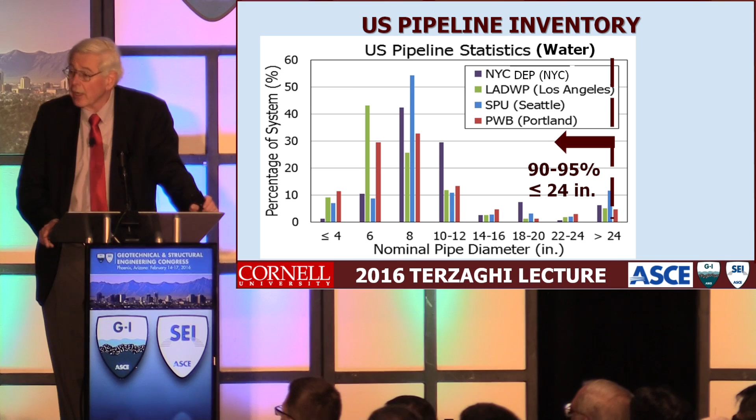Let's look a little bit about that inventory for a minute. What I have here are bar charts showing the percentage of the system associated with various pipeline diameters for 4 major water supply companies, including the New York Department of Environmental Protection and the Los Angeles Department of Water and Power. There's a very interesting statistic here that about 90 to 95% of all of these are in sizes less than or equal to about 24 inches. In fact, LADWP calls their distribution pipelines anything less than 24 inches, and their trunk lines anything larger.

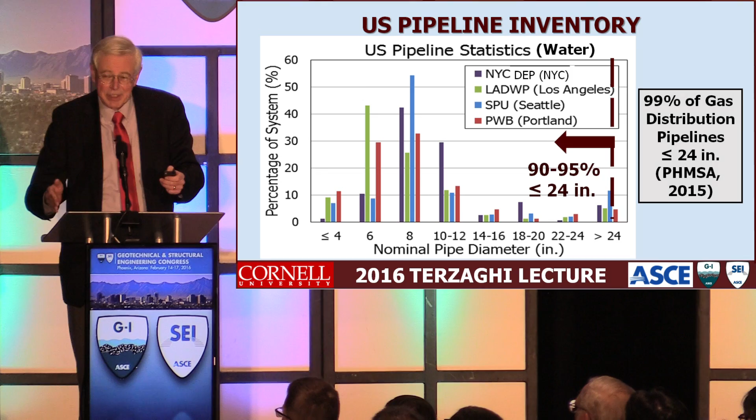Similar statistics can be gotten from the PHMSA, the Pipeline and Hazardous Materials Safety Administration, which has compiled statistics on gas distribution pipelines in the United States - 99% of them are less than or equal to 24 inches. The larger ones, of course, are some of the greater and more important ones, but just to get the statistics right and a sense for the composition of the systems, I thought I'd lay these out because we'll show how they become important later on.

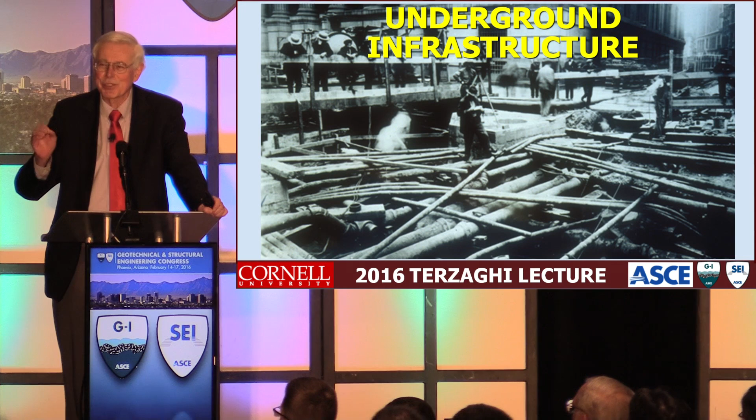So just look at that. That is the national treasure. Those are the pipelines that convey the services and resources that make modern societies work, and they're an absolute mess. This is a wiring diagram. Look at the incredible complexities of the pipelines there. Like any treasure, we bury it underground and then forget about it for ages until there's a problem associated with it.

Pipelines are part of a national challenge to be able to manage, understand, and work with our infrastructure and to make it a better infrastructure. These are some of the issues we have to deal with when we're working in this space.

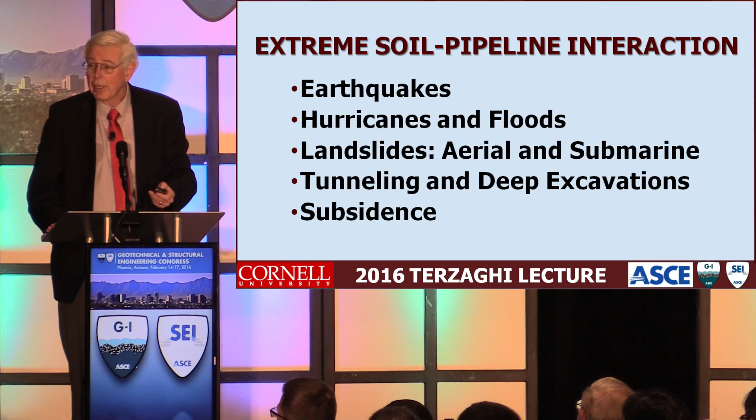Whenever we talk about extreme soil-pipeline interaction, two aspects automatically come to mind: material and geometric nonlinearities. This is a double-edged problem because we have material and geometric nonlinear properties for the soil, and simultaneously material and geometric nonlinear properties with respect to the pipeline structure. The greatest challenge is the geometric nonlinearities, because when pipelines deform and the ground begins to fail along specific failure planes, you get complicated and complex behavior.

So I'm going to start the technical part of this talk by looking at where the rubber meets the road, and that is where the soil and the pipeline meet.

But they will eventually squeeze shut, and that'll be a function of what kind of pressure they're carrying. But often in an extreme event, we can't rely on the line to have pressure in it, because it could lose pressure from a variety of different operational or other failures in other parts of the system. So they really need to survive with low or zero pressure if they're going to maintain their integrity.

We studied these pressure distributions by using tactile pressure sensors. These were introduced to us by Tarek Abdoun at RPI. We were able to make them work in these large-scale tests where there was great deformation and distress on them. This is a picture of one of them with one of our lab technicians, Joe Chipolowski. There are about 2,000 sensors.

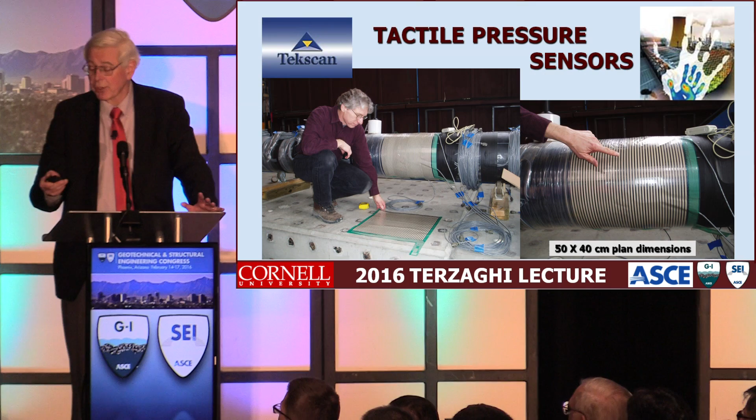These are electronic sensing units which will have voltage drops, which when we monitor them, we can come up with a pressure distribution and therefore actually measure the pressure distribution around nonlinear objects like pipelines under large ground deformation.

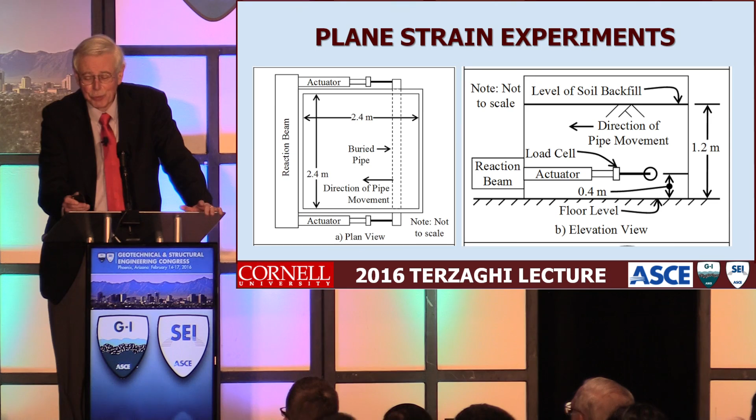We could get the pressure distributions from the tactile pressure sensors, and we could validate those because we were actually measuring with the load cells the actual loads in the pipe, and we could correlate the pressure sensor loads with the actual measured loads.

One of the things we want to do when you get that kind of test measurement, you're getting a normal pressure on the pipe, which is illustrated by this picture. And if you want to break that down into the horizontal pressures, then you have to decompose the normal force, which also generates a frictional force on that pipe. So there's a double decomposition to get the horizontal components, which is illustrated in this particular diagram.

You can integrate this. Now, this is an equation that was originally developed by Mike O'Rourke, so I want to recognize him for doing that. We used it as our research team. It shows here you can integrate the horizontal components from those components which are perpendicular to the longitudinal axis of the pipe, from the normal force and also from the frictional force.

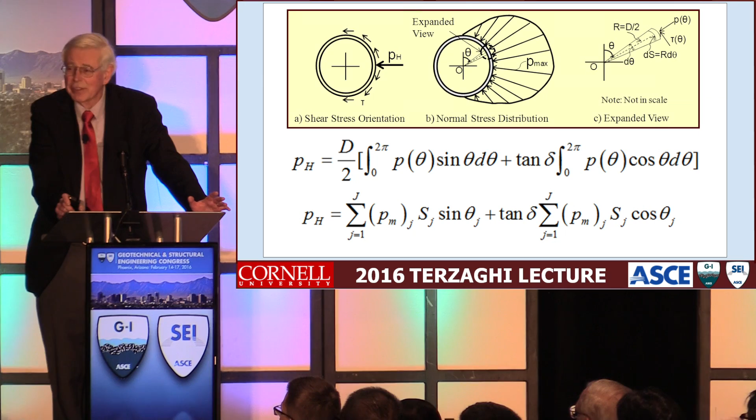And you can also do this in a numerical fashion by using the actual tactile pressure sensor data, which is the second equation there. And here's some examples of the pressure distributions that were monitored during some of these two-dimensional plane strain tests.

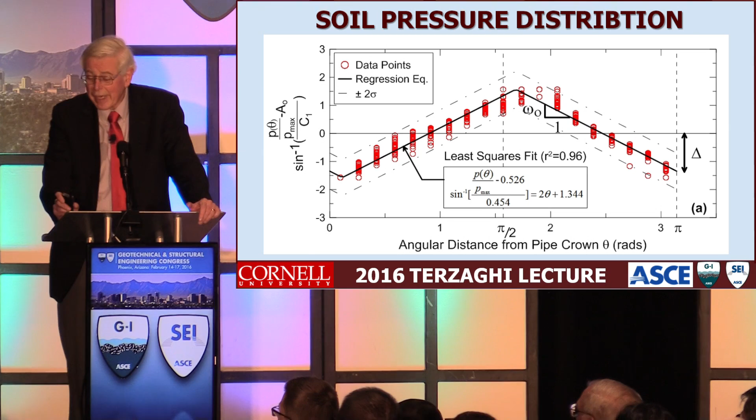What you can do with those data is take it and put it into some form of a conversion function. In this case, if we assume there was a sinusoidal distribution, you can take an inverse sine function and turn that into a linear regression, and show that regression will fit the sinusoidal distribution of the data, and be able to tag that with some moniker or metric of the statistical substantiation or stability of that.

So we have an R squared of about 0.96. You can see the black regression line. It's a very well-defined sinusoidal distribution. You can see the data ranges. We have about 17 or 18 different data sets shown in this particular slide.

And I think what's also quite interesting, and we'll come back to this later, is that there's numerical analysis that we've done. You can do the same thing with those. You can take the normal distributions to those and decompose them into the horizontal components, and they actually show a very good relationship too.

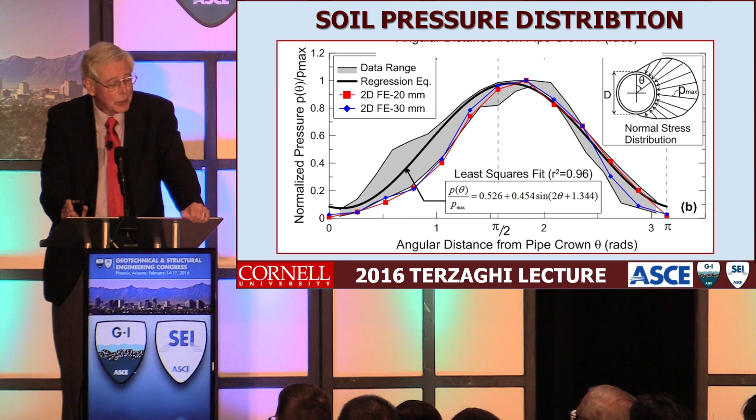So in this particular slide, what we've done is plotted the normalized pressure distribution, that is the pressure distribution divided by the maximum pressure, and you can see the good fit with respect to the sine function.

For lots of numerical reasons, when we roll these things up and do analyses, it becomes useful for us to be able to define what we would call an apparent frictional force, which would be generated by the horizontal force in this case, that P sub h, multiplied by the tangent of delta, where delta is the angle of soil-pipe interface friction, rather than to do the stress normal to the surface. We have two ways that we can decompose our forces.

We can decompose forces perpendicular to the longitudinal axis of the pipe, or perpendicular to the surface of the pipe. It's the one that decomposes perpendicular to the surface that generates the frictional resistance longitudinally. So to couple all of this, you look at the relationship between the actual friction, which is longitudinal—that's F sub t—and the apparent friction generated by forces perpendicular to the longitudinal axis. We've measured these very precisely, and we can plot them to get a transfer function.

You can use this dimensionless value, plotted as a function of the interface friction angle. If you're testing a high-density polyethylene pipeline, which has a tan delta of around 0.4 or 0.5, you don't need a correction—the two values are virtually identical.

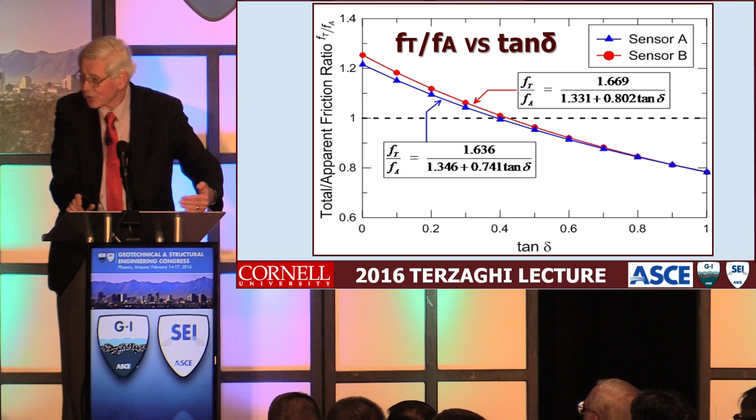So the first thing we learn from this ability to look at the interface—where the rubber meets the road between pipe and soil—is that we need to account for the coupled transverse and longitudinal soil forces.

In the Terzaghi paper, we'll talk about how you can do that in one of the readily available softwares, Abaqus. Basically, you create gap elements which are linked in with your force relationships between the pipe and the soil, perpendicular to the longitudinal axis of the pipeline.

You couple it by virtue of the true friction normal to the surface of the pipe, so that you are truly in two dimensions, accounting for the coupled forces perpendicular to the longitudinal axis and the frictional forces which develop longitudinally. If you don't do that, you will not have the right answer, and you can be very far off and unconservative in the process.

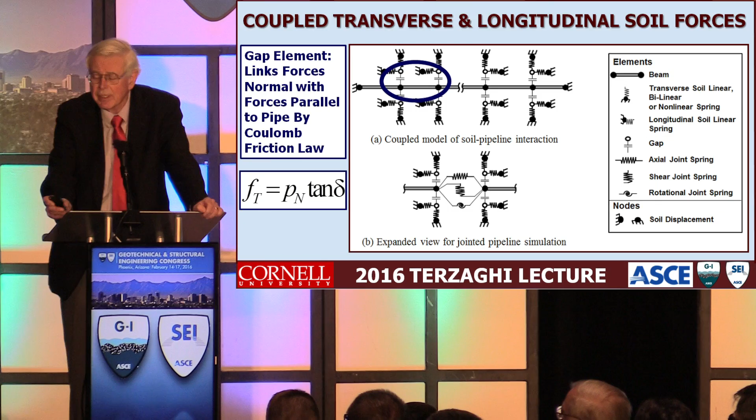So, first lesson: the soil-pipe interface relationship between soil force normal to the pipe surface versus force normal to the pipe longitudinal axis is key for modeling coupled soil-pipe interaction, and for evaluating friction along the pipe from soil force normal to the longitudinal axis. We have provided a way to account for that.

Now, I don't want to call these springs because they're far more complex than that. They're nonlinear and can account for strain softening behavior. You can pack a lot of detailed soil-structure interaction into these, or you could make it very simple and make it a spring. But we have the capacity to go far greater and do a much more sophisticated job, replicating very complex interactions in the pipe and in the soil.

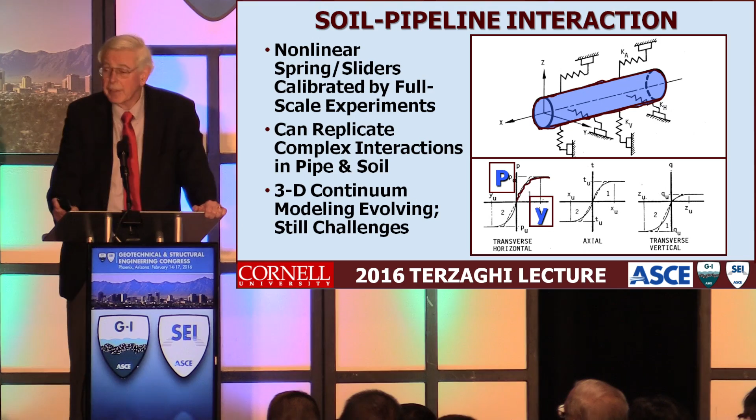And then there's also 3D continuum modeling, which is going on. It's evolving—there are still challenges, but there's been some extraordinary progress made in three-dimensional modeling too.

And then there are a number of very interesting works. Our colleagues at RPI and ourselves, with Xi et al., in a paper in EERI in 2013, looked at a variety of different ways of modeling three-dimensional pipelines in solid soil conditions, modeling the pipe as a shell element and modeling the soil as a solid.

Recent work, Robert et al., this is work that we did with the folks at Cambridge, Kenichi Soga, and Dylan Robert, who is a professor at RMIT in Melbourne, Australia, looked at a variety of three-dimensional shell modelings, and some excellent work by Vazouras in Greece looked at three-dimensional soil pipe interaction conditions.

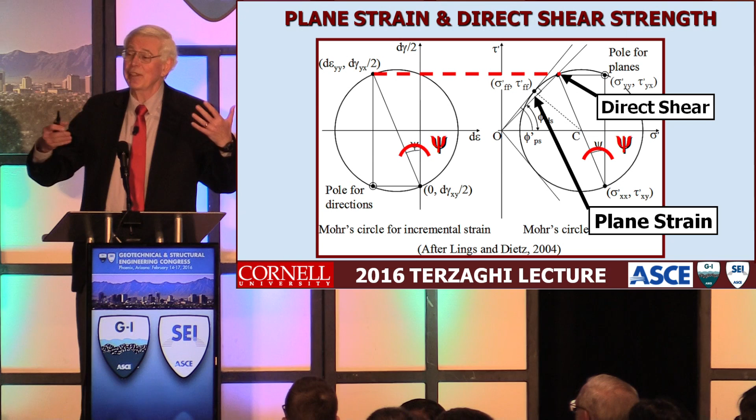Also, when you recognize that failure of the soil along the longitudinal axis of the pipe is also a surface of zero extension, you actually have a test that can provide relevant strength data for the interface as well as for the soil structure surrounding the pipe.

We perform tests because we come from an area that was glaciated, and believe me, when we left Ithaca it was 16 below zero. I think glaciers were coming back.

We deal with glacial fluvial sand. I'm showing some of the characteristics there, and some of the types of direct shear boxes that we use—large ones, 100 millimeters, 300 millimeters in diameter. We decided to characterize the sands as medium, dense, and very dense, and those are associated with direct shear angles of shearing resistance varying from about 35 to 43 degrees.

But when those are converted into plane strain, they go from about 41 to 49. So these we're taking as emblematic, or representative, of granular material. That's because these are the kinds of soils that we looked at. We looked at them fundamentally, but they still have specific characteristics which you see up on the screen.

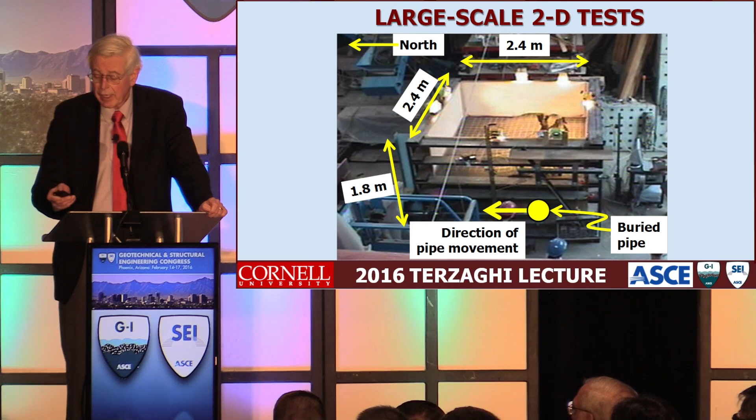Then we developed some two-dimensional models for these plane strain tests that we ran. This is just showing a picture of one of these plane strain tests. Our analytical model worked off a Mohr-Coulomb yield surface. It had a strain-compatible modulus, and we also had a special subroutine in there for strain softening from peak shear, so it could account for strain softening situations.

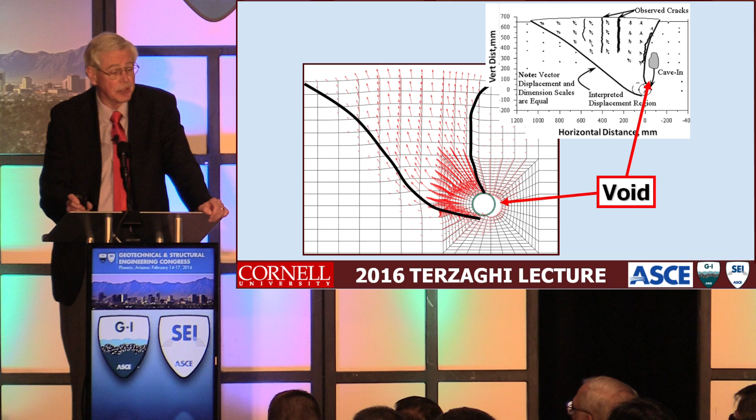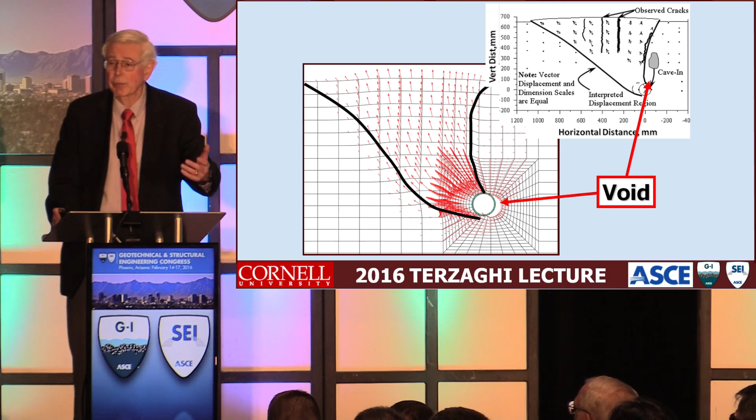If we show the next slide, you can see some of these simulations with the pipe being pulled laterally through the ground. If we freeze that and look at some of the testing, you can see that the pipe pulls away from the soil in the analysis, and also in the tests the pipe pulls away and leaves a void, particularly when we're testing with partially saturated soils, which are really the right representation for the soils we're going to account for in practice.

In fact, when we compare the analytical results with the experimental results, there's been excellent agreement, not only for these tests associated with lateral pipe-soil interaction, but also vertical upward pipe-soil interaction, even to the extent we've developed an auto-remeshing situation where you account for the pipe moving up in the soil, as it begins to punch out of the ground, the reduction in vertical force, and the way that relationship between pipe force and displacement should look.

So we can roll these up, and these have been published in various journals, including the Geotechnical Journal, Geotechnical Geoenvironmental Engineering Journal, and the Canadian Geotechnical Journal. We show these dimensionless forces, which are the forces we measured, divided by the unit weight of the soil, the depth of the center line of the pipe, the diameter of the pipe, and the length of the pipe. If we take the length as a unit, you can get the force per linear distance. We plot these relative to a dimensionless depth, which is the depth of center line divided by the diameter, and can come up with relationships that allow us to predict what the maximum forces are going to be on the pipe.

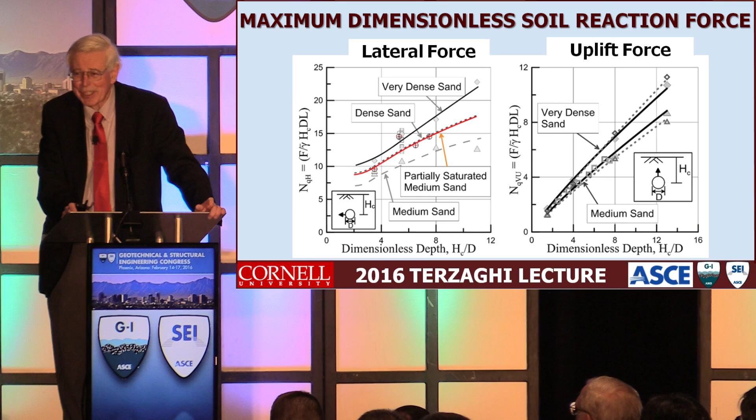Now, there's something really interesting in this picture, particularly the one on the left, because what you'll see in that orange line are the partially saturated tests we performed at Cornell, along with the dry soil tests. For the same soil with the same dry density, the partially saturated medium dense curve is higher than the medium dense dry sand curve. So suction in the soil is contributing an additional 20% to the load. That's something that's generally not recognized or neglected when we account for this interaction between the pipe and the soil.

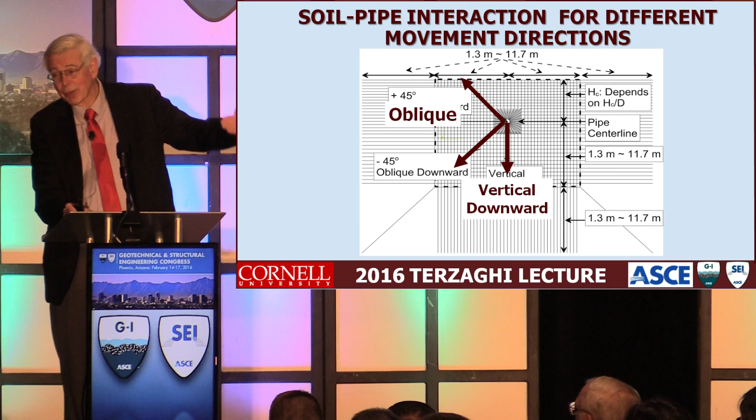We can go further with this model, having validated it in the two directions we've tested intensely and feel comfortable with the model. We now can look at pipe-soil interaction in the vertical direction downward, in the oblique directions. We can do a full 360-degree sweep to come up with a characterization of the soil-pipe interaction for any direction at any depth in the soil. And that's what we did.

We started off with the vertical, and when we ran the vertical, you can see on the left-hand side the dimensionless force plotted with respect to the dimensionless depth for the vertical reaction. We also could compare that vertical reaction with the conventional bearing capacity equations, which are very often advocated and used in design. We found that systematically the actual forces we were modeling were less than what's given by the conventional bearing capacity formulations.

This was an observation also made at RPI based on some of the centrifuge tests they did for normal fault interaction, where they suggested reducing the conventional bearing capacity formulations by about a half, and sometimes as high as a third. So we certainly can validate that particular experimental observation from our colleagues and show that, in fact, there is a lower resistance, and we factor that into our results. I must say that these are partially verified experimentally by centrifuge tests, and certainly make good sense to us from a numerical simulation point of view, but this is an area where we could actually use some large-scale validation to finally finalize this particular pursuit.

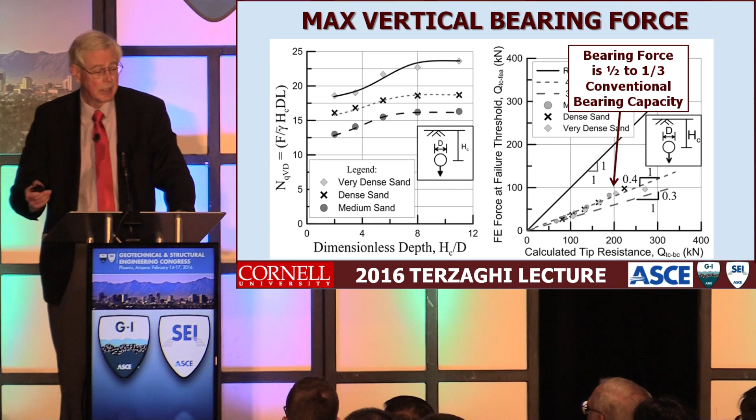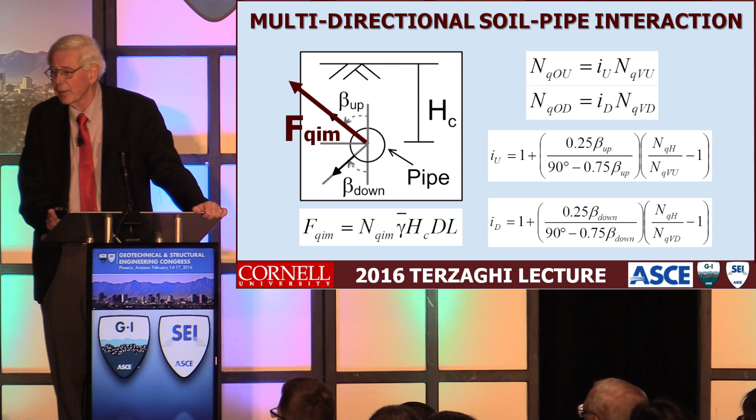By these equations, you can account for the variation in maximum load 360 degrees around the pipe. So you even can boil this down to a set of very easy manipulable equations by just knowing what the reactions are at four points around the circumference of the pipe. And that's really a significant recognition.

These are showing a kind of summary of these analytical results for the ratio of the N-sub-Q, that is the reaction, dimensionless reaction number for the pipe in any direction, normalized by the horizontal, because we have so much good horizontal data from the large-scale tests. What you can see on the left-hand side is the 360-degree plot of that ratio. You could see when the dimensionless depth is shallow, so that HC over D is 3.5 in that upper left-hand corner plot.

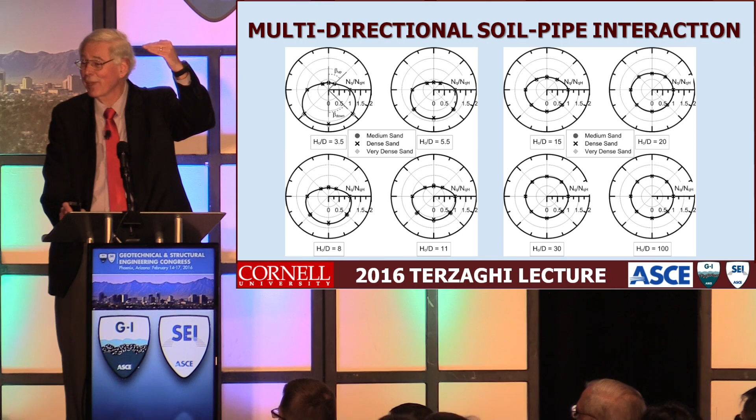You can see that it's a very asymmetric distribution, 360 degrees around the pipe. Because you're so close to the surface, the uplift force is very small when normalized with respect to the horizontal, and the vertical is still pretty high.

But as we continue to go deeper through the soil, you can see that by the time we're getting to depth-to-diameter ratios of around 30, you're getting into circular, and then finally you have circular uniformity where at depth you should not be able to distinguish horizontal from vertical.

So we have the opportunity now to have a comprehensive methodology that looks at the interactions in the full 360 degrees. We also can characterize the force displacement relationships by using rectangular hyperbola. That's a great way to fit nonlinear things. We use it all the time.

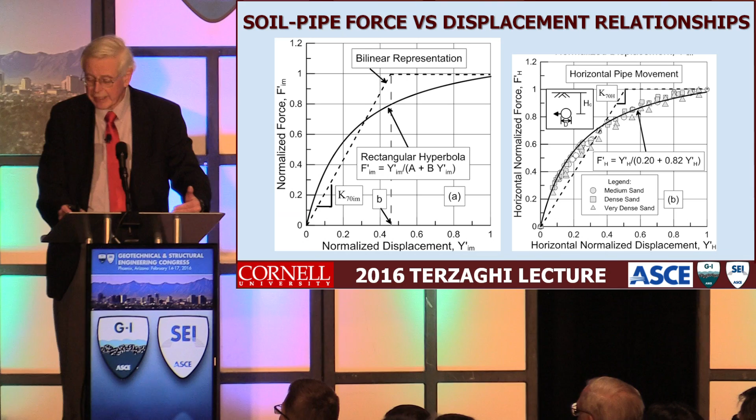And in the Terzaghi paper, you'll see that we've provided equations predicated on this rectangular hyperbola to characterize the force displacement relationship, as well as the maximum force in any given direction at any given depth.

Now that brings me to soil suction. We depend upon soil suction all the time for the stability of the ground, because if everything was dry, we would have just the friction we were supposed to have. But really what happens is we live in the vadose zone. Many areas will have partially saturated or unsaturated soil conditions, and that apparent cohesion keeps things going.

It's when that breaks down that we actually get some surprises, and we get some landslides and things of that sort at times. That works to our benefit, but when we're characterizing the reaction between pipes and soil, it works to our detriment because it adds to the resistance.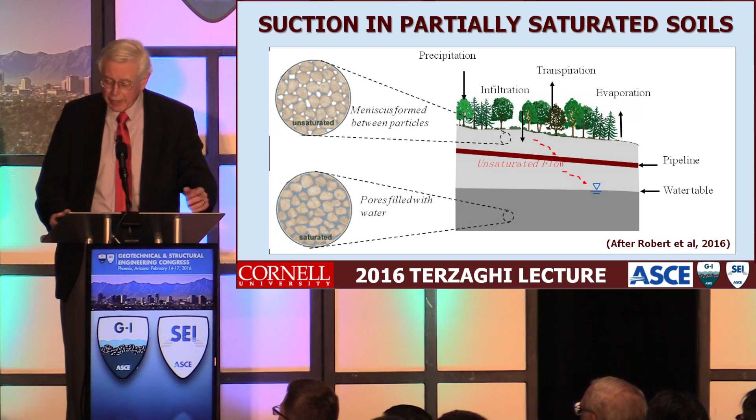So the most recent work that we've done with our colleagues at Cambridge, with Dylan Robert and Kenichi Soga and others, allows us to develop a simplified way to guide us in terms of accounting for the effects of suction.

I'm going to show it to you right here in this colored chart. On this chart are the class 2 and 3 boundaries of fill in the ASTM recommendations or standards. So if you're using class 2 and 3 fills, which are specified for burial of pipelines, those are the black lines. As you get smaller and smaller grain sizes, so as the grain size goes from left to right, your potential for suction goes higher.

Now what we did in our models is we defined it for the degree of saturation and maximum suction. I don't know what the degree of saturation is going to be for your pipe in the field, so we defined it as a maximum to get the worst case, and then you have to use some engineering judgment or additional evaluation from there to account for the suction effects. But you should never neglect them.

For example, if you look here, if we go to the low zone, in this case, the soil pipe reaction force may be 1.2 times higher for the soil suction conditions. Going over to that red zone, it could be 2 to 3 times higher.

One of the practical benefits from this curve is that if you go to the left of the blue zone, none of that develops suction any higher than a dry sand. So you don't need to make any corrections, and if you want to dig a trench which has sloping sides and fill it with material that has those characteristics, then you're not going to get suction effects.

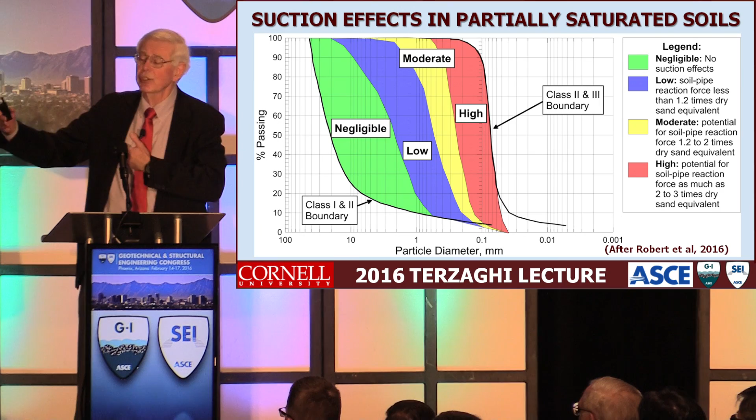If you get into the finer grain size, you do need to consider suction and take that into consideration. This leads us to a design chart where we specify various characteristics for the pipe, and we ask ourselves, given the dimensionless depth, does the pipe size have any effect? And of course it does.

Because if you were to take a depth-to-diameter ratio of 2 and you were to have a 1-foot diameter pipe, you'd then have a depth for that pipe of 2 feet. If it was 6 feet, it would be 12 feet. The confining stress with depth suppresses the angle of dilatancy, and therefore your peak shearing resistance will decline.

Our model accounts for that because through direct shear we break this all down into the angle of dilatancy components for different levels of stress and so forth, and those corrections are shown on those graphs which I'm presenting here. In the upward direction, we don't see the effect.

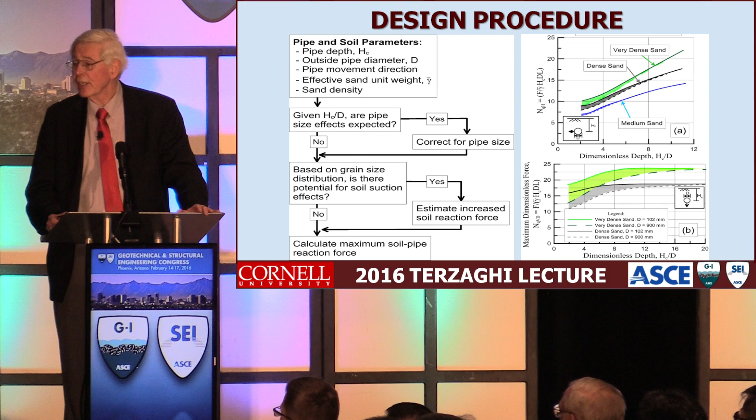For the downward direction we see a significant effect, and for the horizontal it's important to consider many of the times. So now we go back to taking this model and looking at it from an experimental validation perspective.

If we look at some of our large-scale tests of a 250 millimeter diameter high density polyethylene pipe, what I'm showing here are the measured experimental results relative to the analytical results if you didn't consider the coupled soil friction normal force relationships—that is, if you just took the K0 conditions that are in the pipe prior to the ground rupture event. You can see that they are under-predicting.

These are left lateral strike slip fault experiments, they generate a lot of force normal to the surface of the pipe, and they amplify the friction where that normal force is occurring. When you couple the two, you properly account for that amplified friction and therefore the strain attenuation that has to occur at the center of the ground rupture.

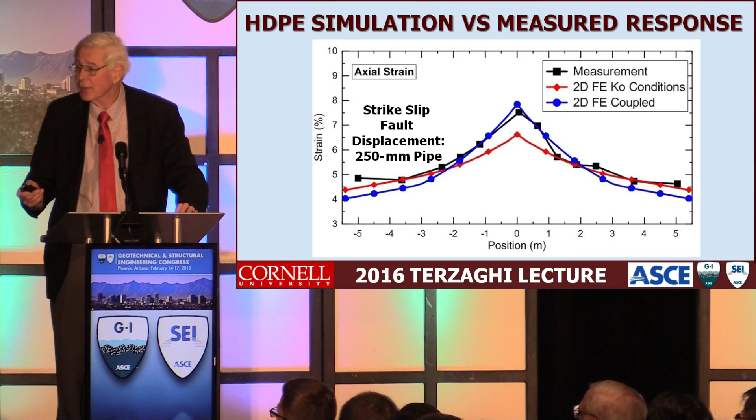So when you do that, the measurements come into very good agreement with the coupled analytical results. Similarly, these are other tests we ran looking at the difference between partially saturated and dry sand. In the 250 millimeter diameter test, the partially saturated model over-predicts a little bit the maximum axial, but it actually does a better job predicting the bending strains. You can always break this performance of the pipelines down into their axial performance and their bending performance.

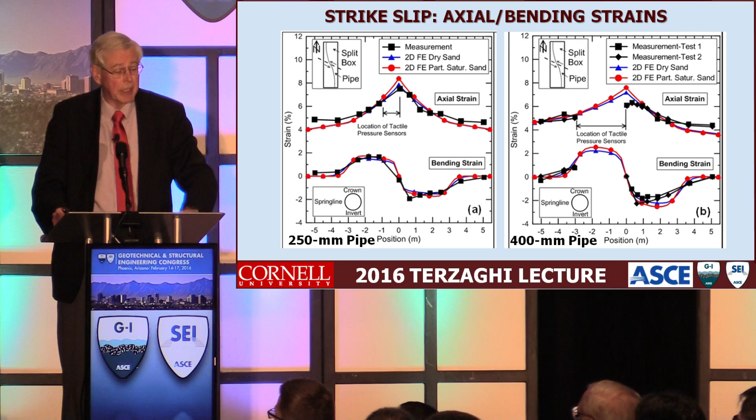The test on the right-hand side of this projection is a larger diameter pipeline, a 400 millimeter, 16-inch diameter pipeline. Your data are missing in some locations because we had tactile pressure sensors there. And again, you get a good agreement between the measurements and the actual analytical results.

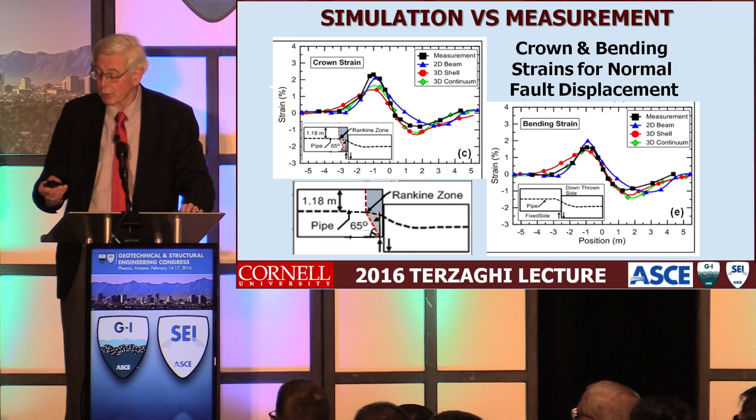So, lessons on soil pipeline interaction: we have an integrated methodology for soil pipe interaction for all pipe movement directions and depths, where the height relative to diameter—not diameter relative to height, there's always a typo somewhere—is greater than... I hope this is the last one we see. That should be HC over D.

Simulations show that vertical downward soil pipe reaction forces are about one-half to one-third of the conventional values. That's a very important observation. And of course we have to account for suction-enhanced soil pipe forces.

Now there's a very interesting issue about when we can use two-dimensional analysis and get great results, and when we can't. So we took the knowledge we had from our pressure distributions and tactile pressure sensors, and we created a simply supported beam from a number of pipes evaluated as shells, and applied that pressure to it. That's a proxy.

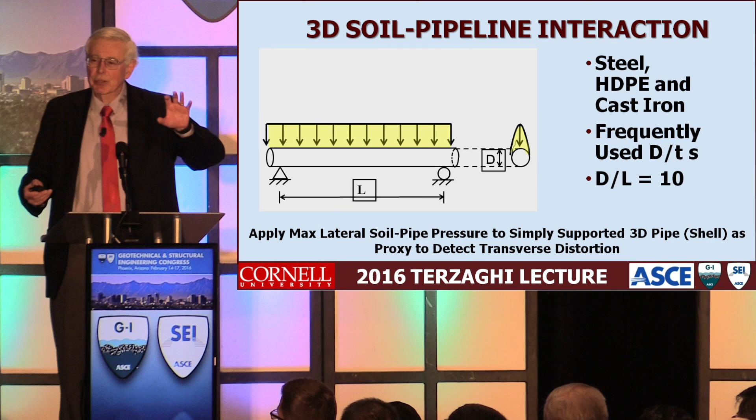When you actually have the soil pipe interaction, the pressure is not a following pressure. It is an intermediary pressure as the soil struggles with the pipe to create some sort of interface pressure at every instance of the deformation between the two. But in this case, we are looking at it as a following force, because if it becomes unstable under a following force due to lateral, or transverse, deformation, then clearly we have to worry about the three-dimensional aspects of things.

So we looked at steel—specifically X52 steel, which we've studied and used because the pipelines at LADWP are fabricated with that material, and we have a great relationship with them. We also looked at cast iron, because pipelines in urban environments are affected, and cast iron pipelines are the most fragile and most problematic. You can look at these cast iron pipelines, again, with a rectangular hyperbola.

When you look at cast iron, even though it's brittle, you should look at it as strain-based. Clearly, pipelines which are ductile have to be looked at as strain-based, but even brittle ones. We did tests on pipe that came out of the ground after being there for 50 to 100 years, and these are the tensile stress-strain relationships.

You can see some of them are failing at about 0.25 to 0.3%, about 2,500 to 3,000 microstrains. So we don't really like to see strains in cast iron go up much higher than about 600, and certainly no higher than 1,000 microstrain.

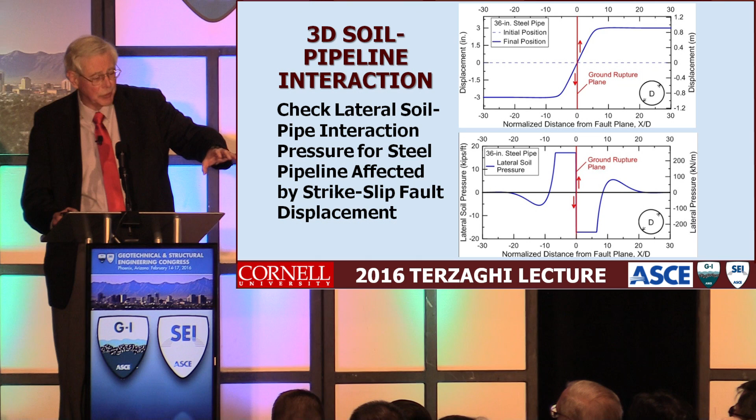So when we look at these steel, HDPE, and cast iron pipes, and look at them not only from that simple model of simple beam loading, but to prove that model gives a reasonable representation of soil-pipeline interaction, we actually ran a couple of analyses for pipelines crossed perpendicularly by the fault.

As we go from 24 to 30 inches, it becomes unstable. That is, you actually start to get transverse ovaling. That ovaling will eventually cause a collapse or crushing of the pipe.

For a following load, if we take that as a representative condition where three-dimensional effects really have to be worried about, what we can say is that when you're 24 inches or below, you can get a really good model out of the beams. But when you're getting 24 inches or greater, regardless of your D over T, you've got to be careful about those conditions. And these are some of the three-dimensional results.

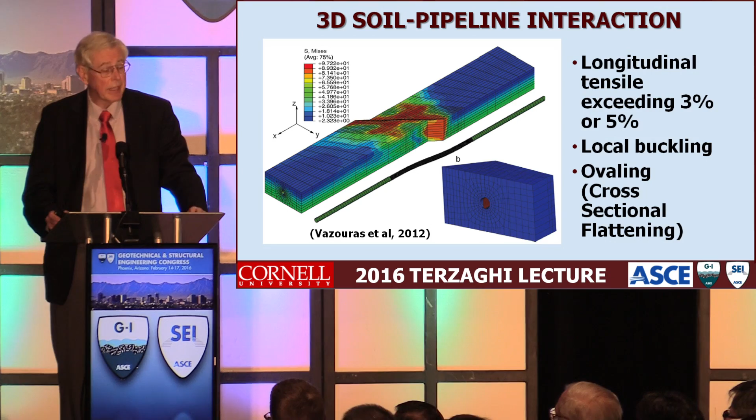I have to really give credit to Vazouras and others for their excellent papers talking about this interaction between soil as a solid and the pipelines as a shell. They have a lot of good recommendations to make there.

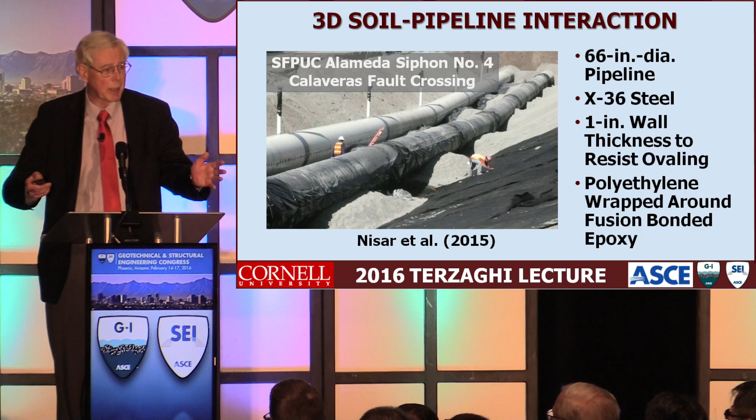They found that ovaling really controlled the design. They actually had to do three-dimensional analyses until they got to a wall thickness that could keep the ovaling to a reasonable location. So we see this dichotomy in the analysis, and I hope that this paper will provide some guidance with respect to when you need to do one kind of modeling relative to others.

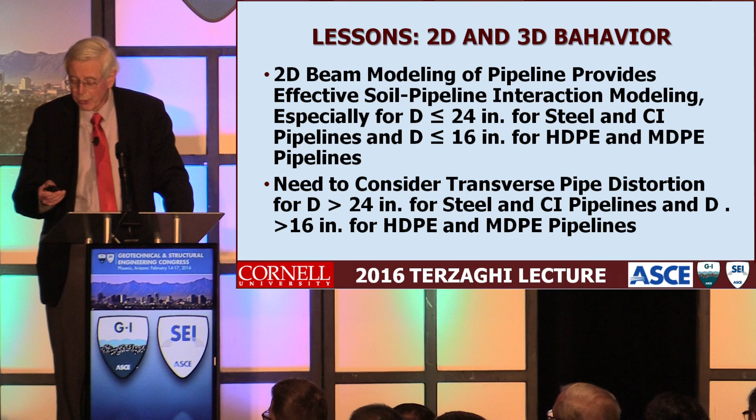So we have 2D beam modeling providing effective soil-pipeline interaction modeling, especially for diameters less than or equal to 24 inches, less than or equal to about 16 for the high-density polyethylenes. And we need to consider this transverse pipe distortion when we're 24 inches or larger for the cast iron and steel, and greater than 16 for the high-density polyethylene.

Let's talk very briefly about next-generation hazard resilience pipelines. What you see there is a picture from the Wall Street Journal. That's Craig Davis from the Los Angeles Department of Water and Power, responsible for resilience there. In fact, they have a resilience mayor - Eric Garcetti is really leading the nation in creating resilience against hazards.

And he went to the pipeline industry and asked them if they could provide pipelines that could absorb some of the large ground deformation expected during an earthquake, and they couldn't provide it. Now, he'd gone to Japan a lot, so he turned to the Japanese, and he gave a big order to Kubota Pipe, and they started to provide pipe.

Well, that generated an incredible response from industries all around the world, and what you'll see next are a number of different innovations in geometric nonlinear accommodation of pipelines that have come forward from a number of different companies, and we're testing them all at Cornell.

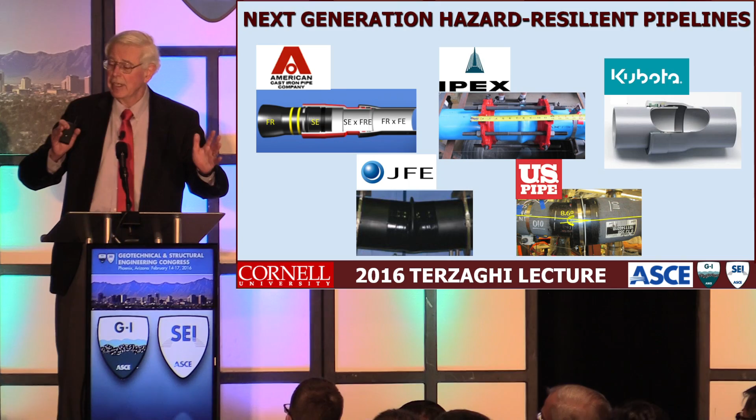Thanks to NSF and having our large-scale facility, we're the group that's actually validating each one of these and able to provide information directly to the water utilities, and all of this information will be up on our website. So you can see some of the pictures of the large-scale testing at Cornell.

There's some really interesting aspects about the next generation of hazard resilient pipelines. This is a picture of one of these expanded bells. These bells will actually move and then grab, so they accommodate axial extension. They accommodate additional rotation, so they can accommodate bending, and they also can accommodate compression.

Here's some of our graduate students, with now postdoc, Brad Wham and Pat. In the test box there, we're looking at US pipe type tests, and you can see that these extra large bells that accommodate this deformation are bigger. They're much bigger. A normal bell is in the background there.

One of the things we find is you drop a lot of stress as you're pulling one of these bells through the ground under large ground deformation. If you don't account for that, you will have an unconservative answer. So the model has to account for these additional stress drops as the bells move through the ground. You can see that 8-kip drop there.

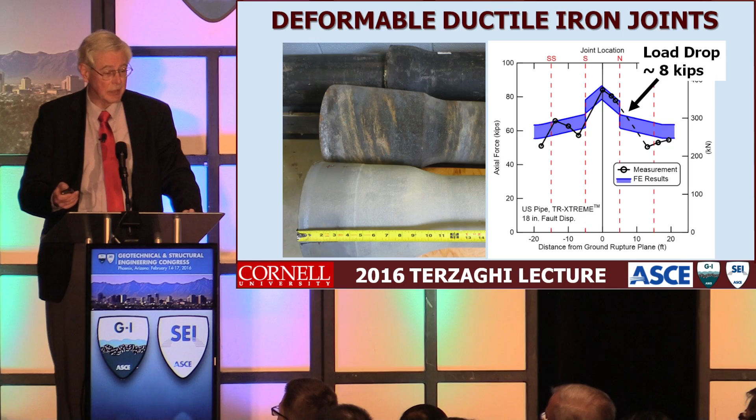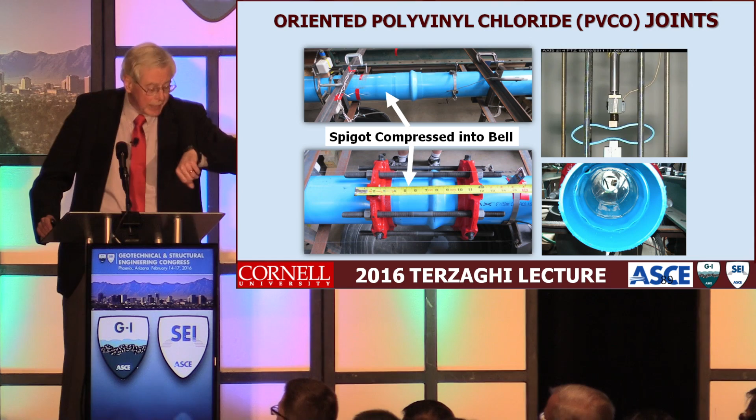This is a molecularly oriented polyvinyl chloride, and look at it being deformed over on the right. This is basically created by expanding a mandrel and getting all the molecules to orient themselves circumferentially. That increases the circumferential strength and allows them to reduce the wall thickness. The real key here is the reduction in wall thickness.

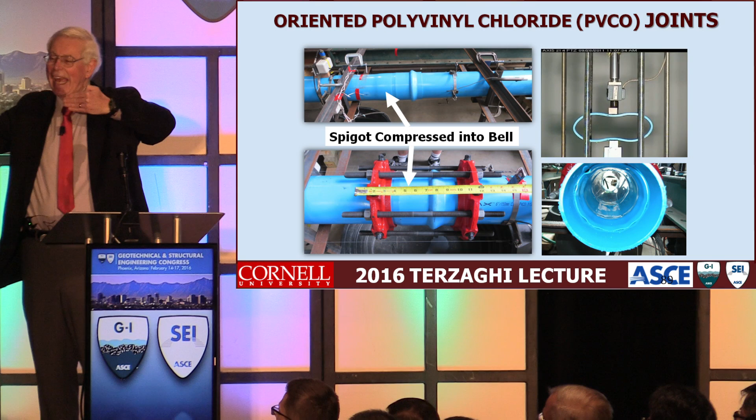And what that does, when we did our tests at Cornell, if you look at the pictures over here on the left, we did compression tests, and that thin spigot, when subject to compression, actually folds into the bell portion of the other side. It accommodates compression by collapsing into the bell, even with those restraints in place. Fascinating, and that's because of the reduced wall thickness from the molecularly oriented material.

So, lessons for next generation hazard resilient pipelines: there's been a paradigm shift in pipeline technology, and this is market-driven research funded by industry. When you think about it, you really can't have resilience unless you have a market, because if you only have one supplier, you're not resilient to the economic situation that they could put you in. It's only having a choice that allows you to engineer both cost-effectively and technically effectively.

In order to develop the next generation hazard resilient pipelines, you have to develop the next generation hazard resilient pipeline models, and that's what we're doing at Cornell, because somebody has to design these things afterwards.

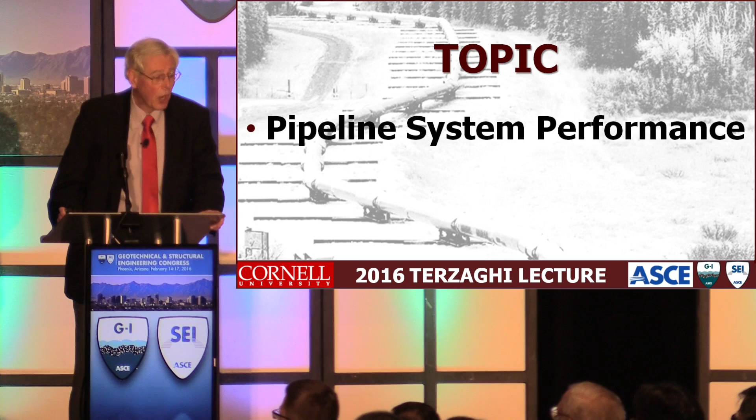Finally, pipeline system performance. I'm going to talk a little bit about the Canterbury earthquake sequence. This was a sequence that's still going on. Everybody here probably knows that on Valentine's Day in Christchurch, they had yet another earthquake, and we wish them well because they've had far too many for one community.

This event has been truly extraordinary, not the least of which in that it has really stressed a modern society, with about $30 billion US dollars, to be 40 billion New Zealand dollars - 20% of their gross domestic product - as one of the repercussions of having to fix things after the sequence of earthquakes.

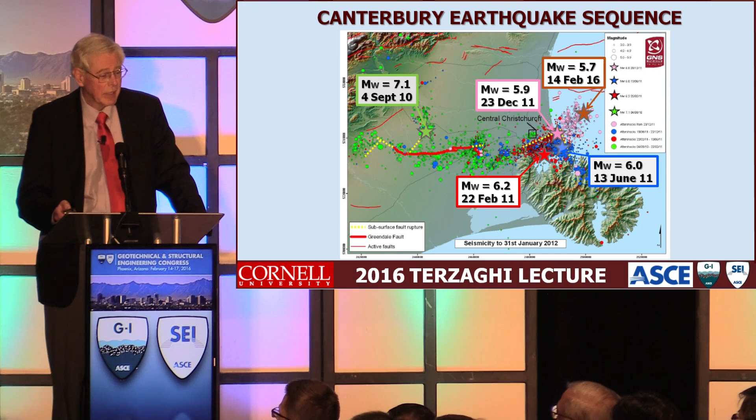So the sequence looked like this: on September 4th, 2010, there was the Darfield earthquake. Then there was the big Christchurch earthquake, which did all the destruction, destroying the central business district of Christchurch, on 22nd February 2011. The 6th magnitude event on 13 June 2011, the Christmas Eve earthquake of December 23rd, 2011, and then most recently, this 14th February.

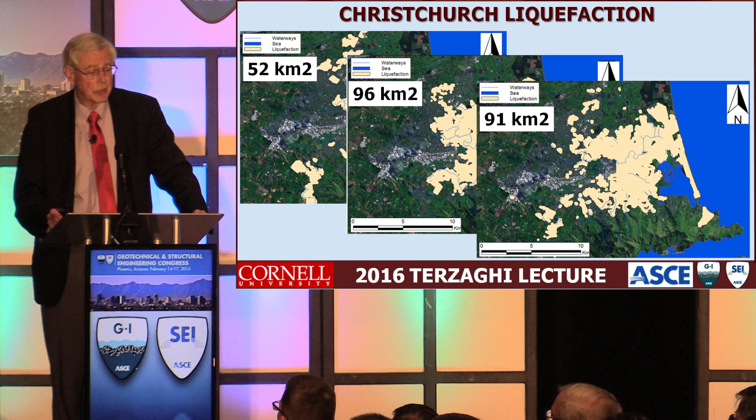We can take GIS maps of areas of significant soil liquefaction, done by the same team, and thereby provide very accurate shapefiles where significant liquefaction was observed. Looking at it for the first three events, you could see that the Darfield earthquake liquefied in significant measure about 52 square kilometers of Christchurch, 96 square kilometers in the 22nd February 2011 event, and about 91 square kilometers in the June 13th, 2011 event. And that's a lot of liquefaction, let me tell you.

So a lot of people don't know a lot about Christchurch, so what we did is we created a special model. It's called the San Francisco scale. We could take the shapefiles of liquefaction from the 2011 February 22nd event, and we'll just move them right on to San Francisco.

So we now know how much liquefaction occurred in Christchurch. It was one Frisco large. And liquefaction is a big concern in San Francisco too. So we could learn a lot from New Zealand, and we are.

One of the things we're learning, because they had the prescience to do this, was to run high resolution LiDAR before and after each event, so we can get lateral deformations associated with each event in the liquefaction zones and vertical deformations after each event. We can then use the lateral and the vertical to do the kind of thing that Boscardin and Cording did for buildings, where we know that buildings subjected to ground movement respond structurally the same way to the same kinds of distortions, regardless of whether that movement is created by an earthquake or a tunnel.

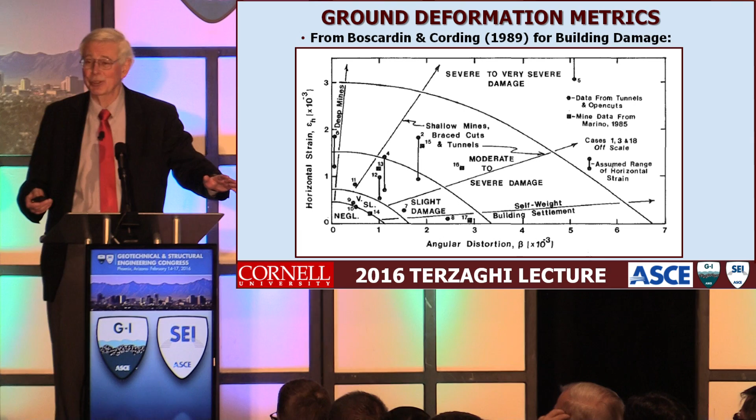So if we can characterize the deformation from liquefaction in terms of differential vertical by an angular distortion, dividing it by the distance between the two points, and similarly with a lateral strain, we can create a unified approach to ground movement effects both on structures and pipelines at the same time.

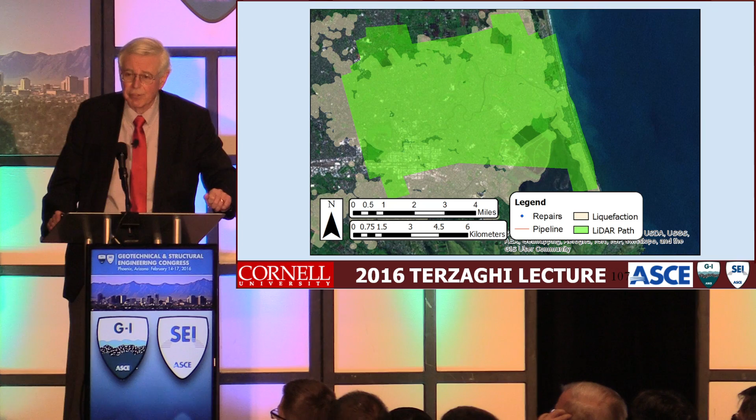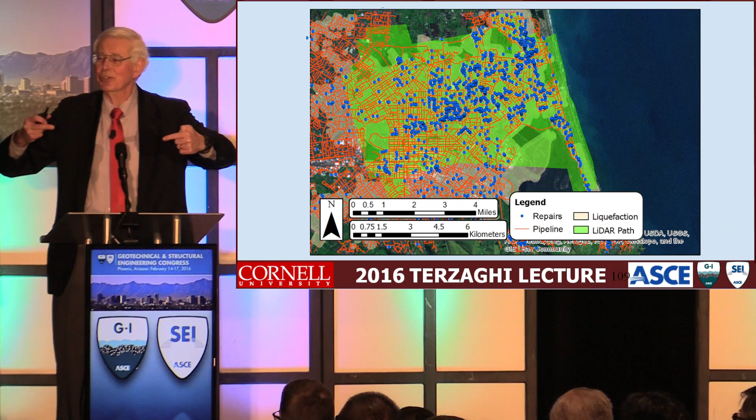So for every level of lateral strain and angular distortion, we can roll up the number of repairs for a cast iron or asbestos cement pipeline and divide it by that increment of deformation by the number of pipeline kilometers that were available to be damaged, and we can get a repair rate relative to both angular and lateral strain.

Now, to do this, you have to have a screening criteria. I'm not going to get into this equation, but there are statistical screening criteria. Mike O'Rourke actually had a big hand in helping develop this. He did it for binomial distribution. We expanded it for Poisson distribution, which is a little more helpful, but the idea originally comes from him.

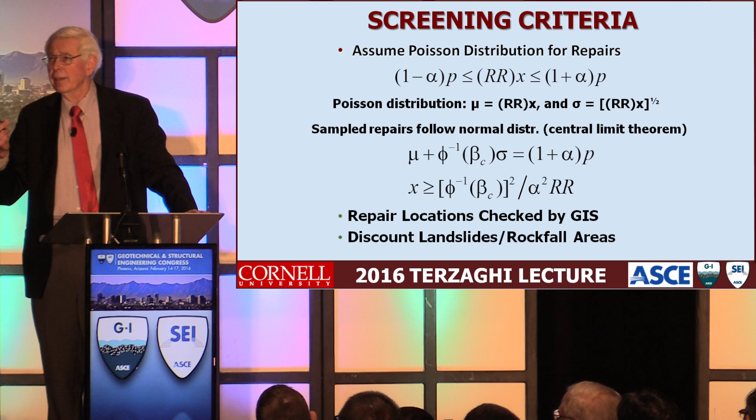And what you can see is an opportunity to screen, because when you're rolling up these big databases, you run into the challenge of having too small a data set for the length of pipeline you have. So you roll up a statistic which is statistically not significant or robust. This allows you to define what's robust and not in your data set.

We defined the lateral strains because we're looking at high definition, high resolution lateral LiDAR data, on 56-meter spacings. The settlement is on 5-meter spacing. So you can create a rectangle, or a square with 4 corners, and do a finite element conversion to get the strains in that cell. From that we can define a unique strain, which is the maximum compressive strain or the maximum tensile strain.

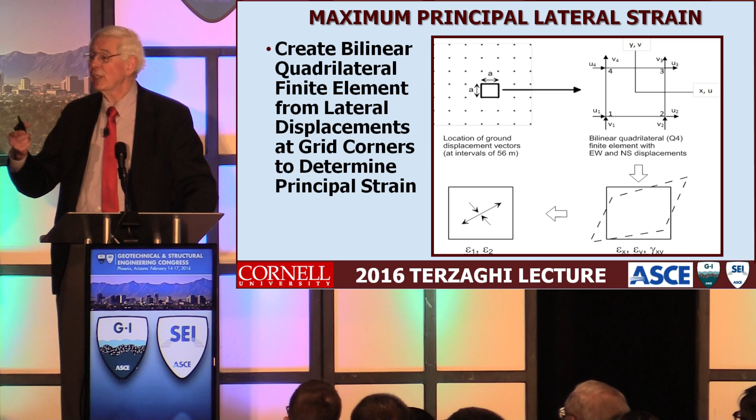So it has the benefit - we don't know if that was the actual strain that the pipeline was oriented to, but it's the unique strain in that vicinity, and therefore the damage must be correlated with it. Because it's unique and the other ones aren't, it's a really good parameter to use.

You might ask, well, why isn't it, when it crosses, let's say for the lateral strain, the vertical axis, why do we get a repair rate? Shouldn't it be zero when we have no lateral strain? Not necessarily, because there may have been part of the data set that got subjected to differential vertical movement. So you have to roll them both together to get the complete perspective on this.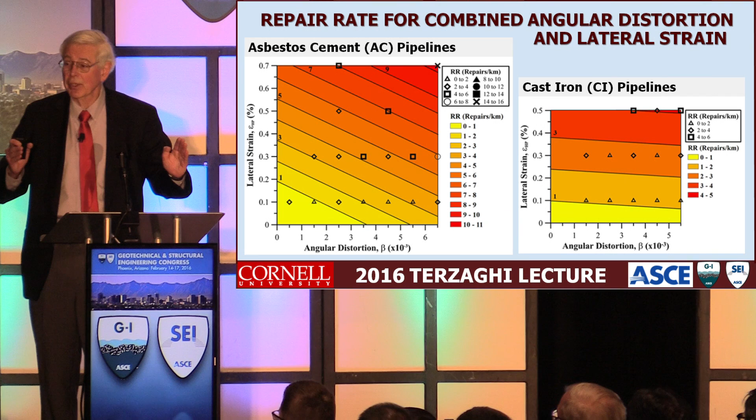So that is quite consistent with what story you would have heard if we were talking about the tunneling effects on different pipelines.

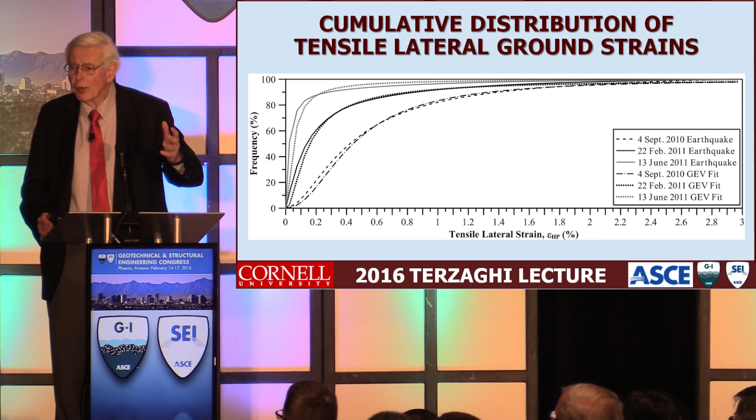We can also take the entire data set for Christchurch. That's for a particular LIDAR run in areas of liquefaction—maybe 4 million data points for the lateral strains, and about 3 million and change for the differential verticals, because those are on 5-meter spacings while the strains are on 4. We can characterize the cumulative distribution of strain for each earthquake, as you see in this plot.

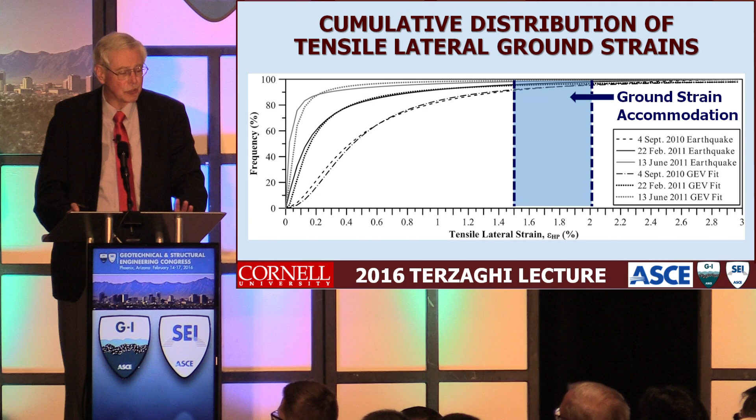We can look at what this next generation of hazard resilient pipelines is able to accommodate in terms of lateral strain, if we put these joints in and set them at the right level, at lengths of pipe between 20 and 15 feet, which is the preferred laying length for utilities in the field. If I show the range that can be achieved with this pipeline technology, it shows up right here: they're able to accommodate ground strains ranging from about 1.5 to 2% lateral strain, depending upon the length of pipe used.

Here's some of the kinds of pipelines that can accommodate that, shown as a symbol. That corresponds to these exceedance values for this large-scale field experiment in Christchurch. So you can see that using this technology, you're able to accommodate 95% of the deformation generated in most of the Christchurch earthquakes taken as a single event. This gives utility operators a lot more confidence, because we can relate it back to something real and quantified, so they understand the ramifications with respect to the performance of their systems.

So there's the exceedance levels. Just to finish up, if anyone ever had a doubt about the resilience of polyethylene pipelines, we've been preaching that for years based on the tests we ran at Cornell. During the Christchurch earthquake—this is for the 22nd of February, 2011, the one that really created the most liquefaction—what you see on the left is the areas of prominent liquefaction superimposed on the gas distribution system.

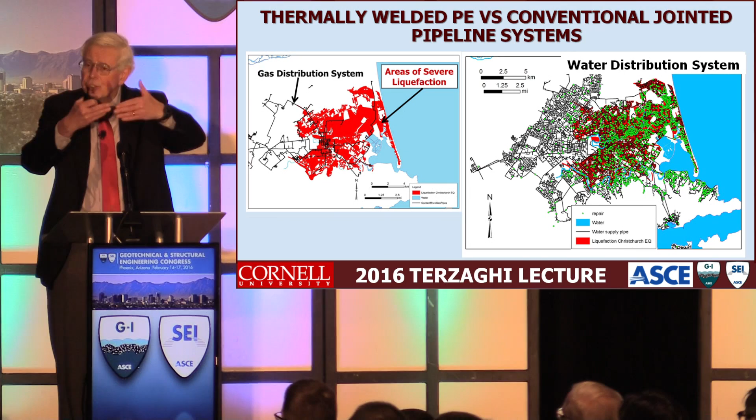This gas distribution system was medium density polyethylene. It has virtually the same characteristics as high density, thermally fusion joined, and so quite continuous and ductile. What you see on the right are the repairs for the water distribution system. There's about 1,700 kilometers of water distribution pipeline and about 1,700 repairs—a lot of repairs because of this earthquake. On the left with the gas, there's only 170 kilometers, but it's still in areas of pretty significant liquefaction and ground deformation. In fact, we know a couple of locations where it deformed quite a bit.

And they both have the same pressures, both about the same diameters, both carrying about the same pressures. There wasn't one repair in the medium density polyethylene system—not one—for all 4 of the earthquakes. Now, I haven't heard back from this recent one, but I doubt we'll find any from that either. Whereas the other one, just one earthquake, 1,700 repairs.

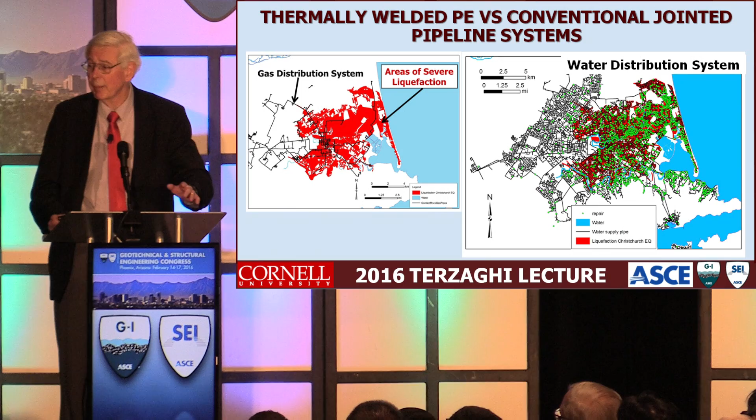So finally, an absolute irrefutable full-scale field experiment showing you the ability of polyethylene pipelines to accommodate quite a lot of deformation—something the gas industry has known about for quite a number of years. So, lessons from Christchurch: an extraordinary data set, multiple earthquakes. Imagine having the same infrastructure subjected again. Imagine living there—the poor folks.

This is really a hardship on them, but the data that has been produced will help people worldwide.

This represents the first-time comprehensive assessment of underground lifeline response to liquefaction-induced differential vertical movement and lateral strain, and a unified methodology for building and lifeline damage versus differential vertical and lateral ground movements.

Now, for the last part of the talk, which is impact on communities, I'm going to use San Francisco to illustrate this. San Francisco, as we just saw, is about the right size for liquefaction during the 22nd February 2011 earthquake in Christchurch.

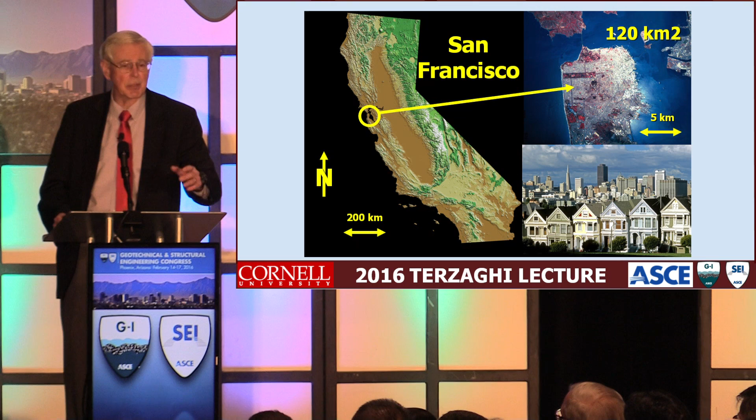97% of the building stock in San Francisco are timber-framed structures closely located relative to each other, and if a fire breaks out in one of those, within a half hour it's consumed the block. So fire following earthquake is the major threat in San Francisco, and in fact San Francisco people know that because in 1906, 392 blocks of the city burned down.

It's still the largest single fire loss in United States history. Now, there have been bond issues passed in 2010 and 2014 to upgrade the auxiliary water supply system. This is a really major step forward, with $400 million in each of these. And we help with the simulation.

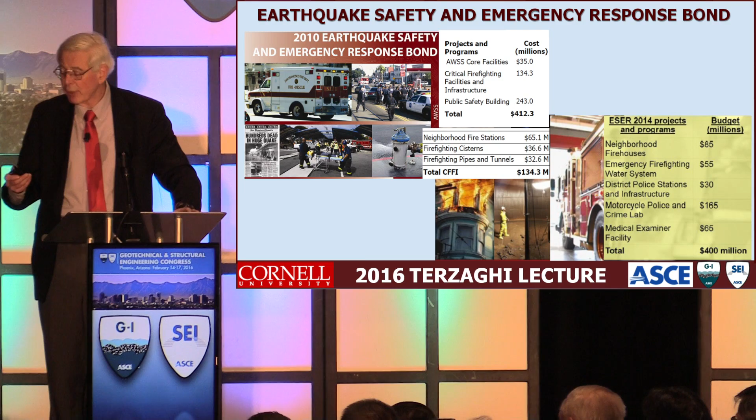In fact, we use the data from Christchurch to simulate repairs to the auxiliary water supply that would occur from the deterministic 7.8 magnitude earthquake, which they are upgrading their system relative to. The way they chose to look at the performance of their system was to divide it into about 40 fire response areas, where the fire stations are located.

If you want to do a good job characterizing community response, you go to that community that knows the most about the response, that is the fire department. So this was a project that worked hand in hand with the fire department.

What you see is fire demand, which was simulated by Charlie Scawthorn, very well known for his expertise in this area, and the pipeline response that was simulated by AECOM with input from Cornell, looking at how much water currently, if you have that 7.8 magnitude earthquake, could be provided in each of the fire response zones.

And we took this to the Board of Supervisors and said, here's the state of the system now. We need to make some changes where you have all of these important financial assets, because San Francisco is a major trading location, has big business, major impact there. They have most of their current auxiliary water supply located close to that.

That's why you still have some green areas there. But we said we need to fix all that stuff. And the Board of Supervisors, to their great credit, said absolutely not—everyone deserves fire protection. Not just the wealthy, not just the people that have all the money, not just the people that are privileged. Everybody deserves fire protection. Go back and give us a program of repair and rehabilitation that distributes it to everybody in San Francisco.

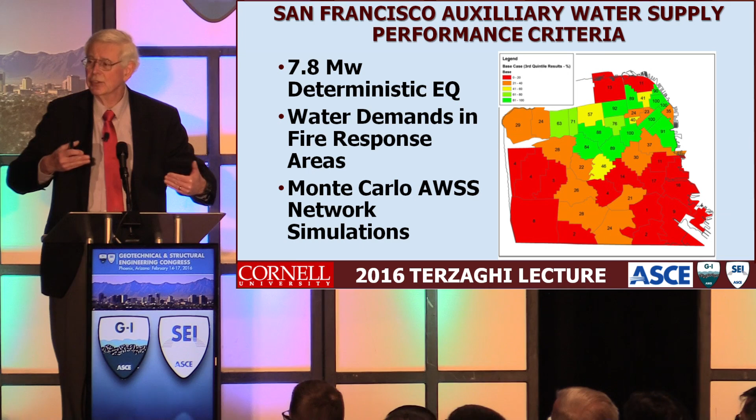This is a marvelous lesson, and we could do that because everything was set up. We reconfigured the whole remake and reconstruction to actually produce this next map. This will take many years to do, but the next bond issue has already been passed, and a lot of the measures that go into making that green map green for everybody is already on the boards, and part of it is being implemented as we talk.

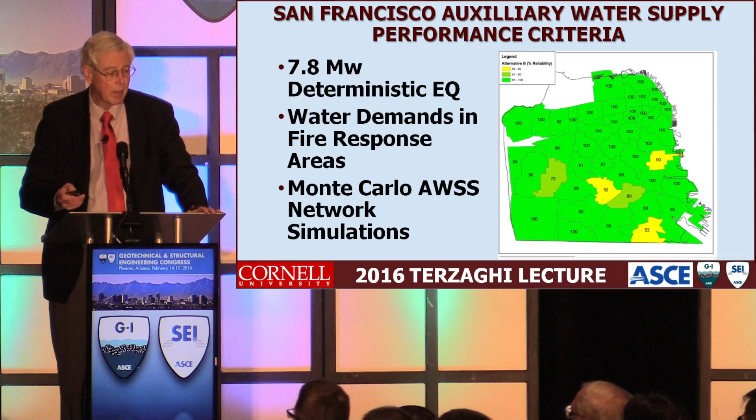So, to end—I'm almost out of time—I'm not going to go through the summary of all of these things, but these are many of the lessons that we've learned, and I hope I've presented them as clearly as I can in this talk.

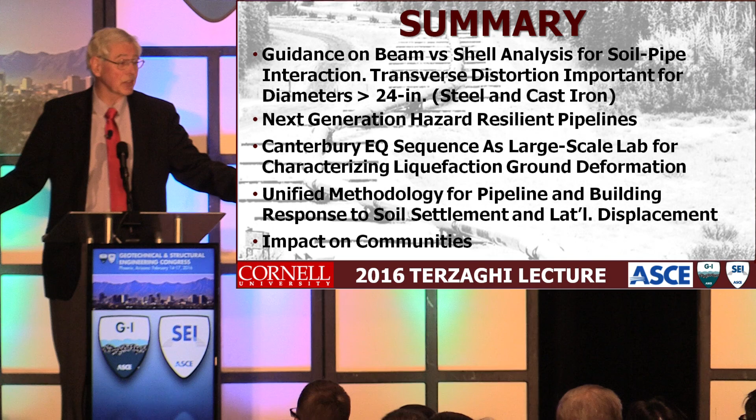But I think the most important of these is really the impact on communities. Everybody in this auditorium should feel proud because what you do has an effect, a positive effect, on a community or a neighborhood someplace. In fact, the very fact that we can stand in this structure without it collapsing, and have a safety factor where we can have this meeting, owes to our structural engineers.

The very fact that the foundations are holding up owes to our geotechnical engineers. So when we look at system-wide response, and all components ultimately add up to systems, our contribution to those systems is immense and extremely important. So in ending this lecture, I'd like to congratulate all of you for doing the great job that you do to keep our community safe and secure and functioning properly. I thank you profoundly.